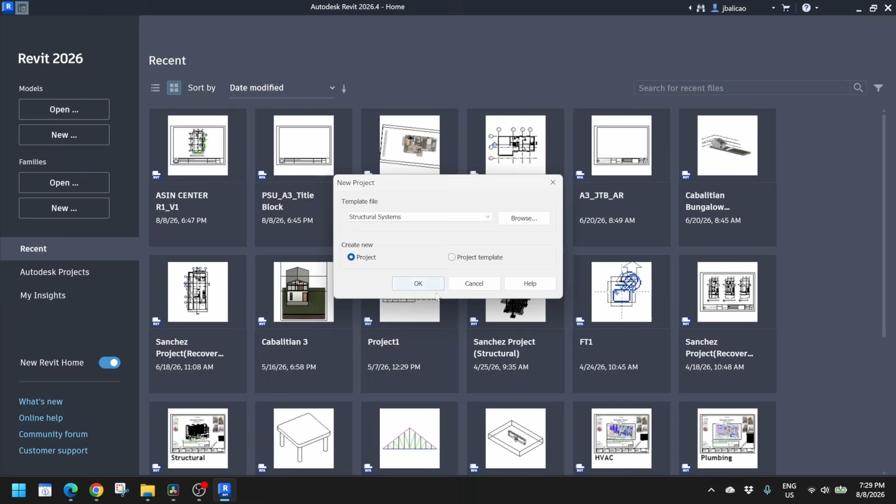I'll just open a new project. The project I'll make, like last time, is structural, so structural systems is what we'll use. Click that, then click OK, and let's wait for it to load. After that, I'll walk you through the actual problem we encounter.

For that, we will go to the Insert tab, then Link Revit. Click that, and we'll go to the file we want to link to our project, because the architectural file is architectural, and sometimes structural, so they don't get mixed up. I want to link my architectural file to this structural file.

I'll go to that file, the file I saved. Here it is, this one. Click open. After clicking open, I'll just wait for it to load.

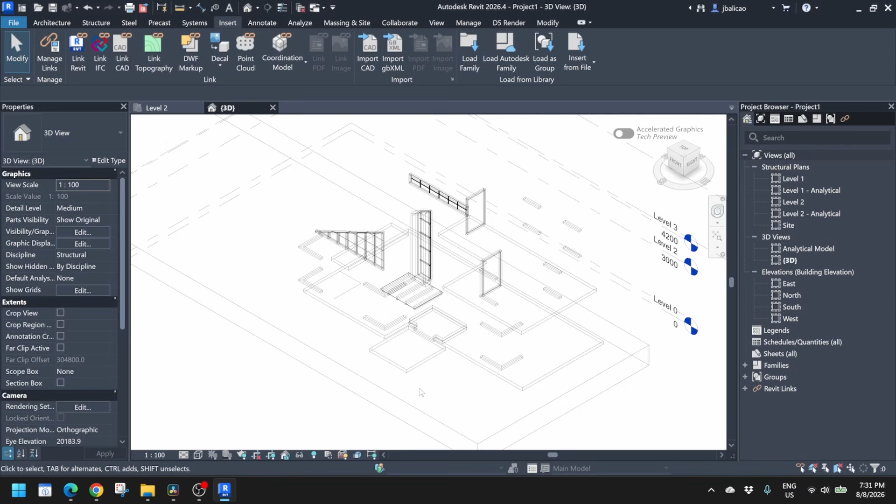So it removed those. So what do we do to make them appear? Because we can't use this when we're placing our columns and beams. For that, I will go to Visibility Graphics.

I click Edit, then go to Revit Links. Here in Revit Links, I will go to the Display Settings. I click this 'By Host View', and then instead of By Host View, I'll change it to By Link View, because that's the view from the original Revit file.

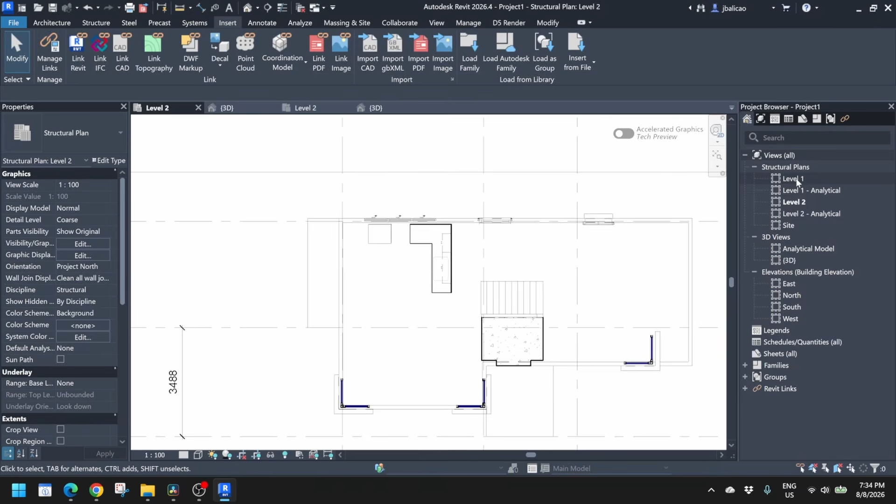Same as Level 1, Visibility Graphics, Revit Links, By Host View, By Link View. Now, the floor plan is Level 0 because that was on the other one, but it's Level 1 that we need. So, floor plan, Level 1. Then apply, OK, apply, OK. So, that's our file now.